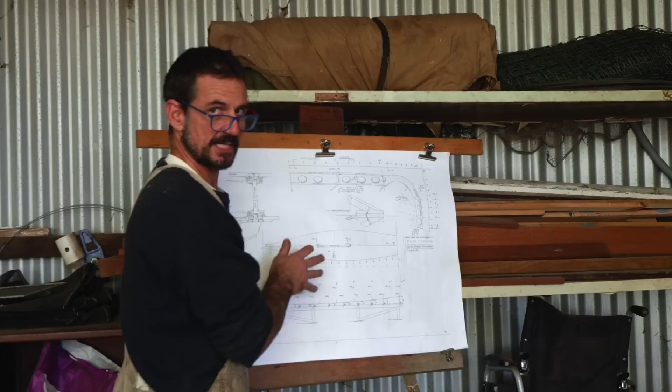Okay, well here's our drawing. Let's have a look at what we're in for at the moment. This is the bottom panel to make up the hull of our boat. The frames are going to be attached to that, and then we'll build up the boat from there. So you wouldn't really call this the floor of a boat, the bottom panel of the hull. There's quite a bit of information here, let's have a quick look at it.

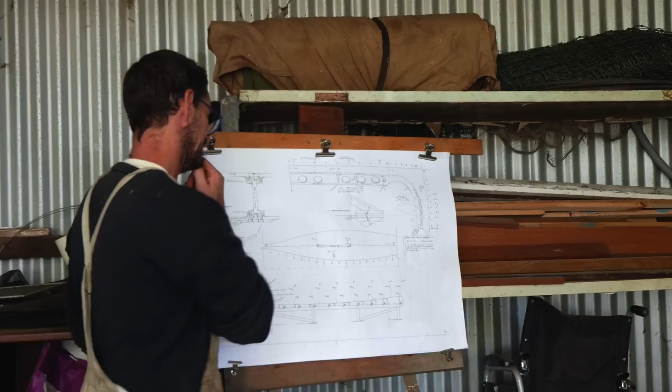We've got our center line of the boat that we're going to take our measurements off to get that nice fair curve you see. Obviously there's no numbers up here because it's exactly the same as that - boats are symmetrical. To get our length, it just says here grid 250, so each one of these little notches along the center line is 250 mil from this point here. How long is it? So it's 5, 10, 15, 20, 25, 30, 35, 40, 45, and it says here NB with an exclamation mark, so note 200. You've got to get that right.

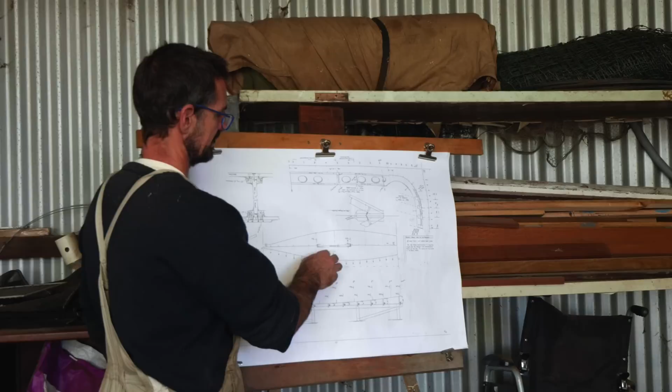You wouldn't have put an exclamation mark otherwise. So what's it going to be? 4,700. Well that's okay because our sheets are 2,400. It even says here this is the end of the first sheet, and coming this way we're going to have a 6-to-1 scarf joint. So we're going to chew up a little bit of this back panel to overlap here, and that'll give us our length. So 2 sheets of 2,400 will be 4,800, our bottom panel is going to be 4,700, so there'll be a little bit of wiggle room there, but not a ton of it.

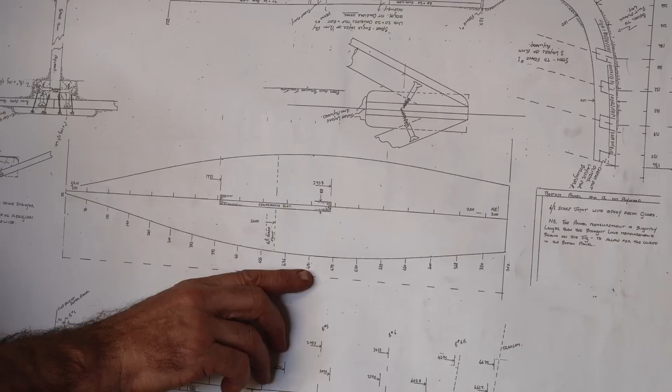Just before we go, how wide do I need to make this scarfing jig? So the largest number coming out from the center line is 481, which is 4 is 8 plus 80 is, so 960 plus 1, 962. I was just doubling that. Okay, so that's all pretty straightforward, I just doubled that number, so we need to make our scarfing jig that wide at the moment.

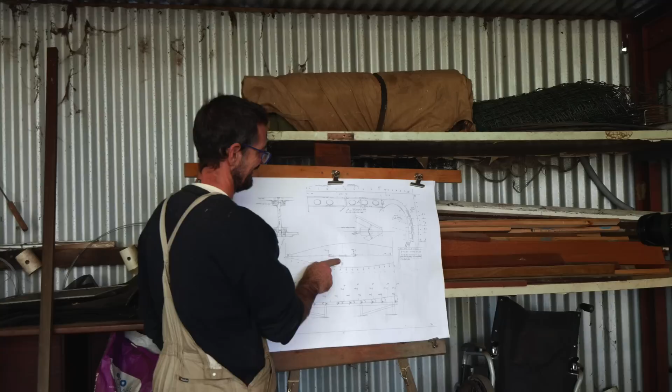I'll make it in such a way that we can unscrew it and reduce it as well, because later on we'll also be planking the hull with plywood, and if we want a plank of plywood going along we're going to have to scarf them together anyway. So we'll make this jig nice and accurate right now. One thing, we want this floor - not floor panels, sorry, our later hull panels - to be straight. We don't want it to have a banana bend in it, I'd like them to be schmicko.

Maybe I better just have a bit of a pause. People, if you don't understand what a scarf join is - there's people with all experience levels who join me, so sorry for those who already know - but let me just get the cobwebs and dust off this thing.

I just wanted to talk very quickly about a little habit I got into a while ago: whenever I drill a hole in metal, just use a countersinking bit and gently relieve it. Just slightly countersink those holes, and what it does is carry away any burrs left from the drilling process. That means when you come time to screw it on anything, there's no little bits of metal holding it apart, like a millimetre apart. It also means you're not going to cut yourself on any little burrs. It's a nice little habit to get into. I'm sure a lot of you already do it, but I thought I'd mention it for some people that might not.

Okay, with our wood clamped to these ramps here, that means I can hopefully just put this up here, connect it, and it'll end up square.

Just make sure that that is butted up there. Drill it and screw it.

There we go. Yep, no binding at all. Beautiful.